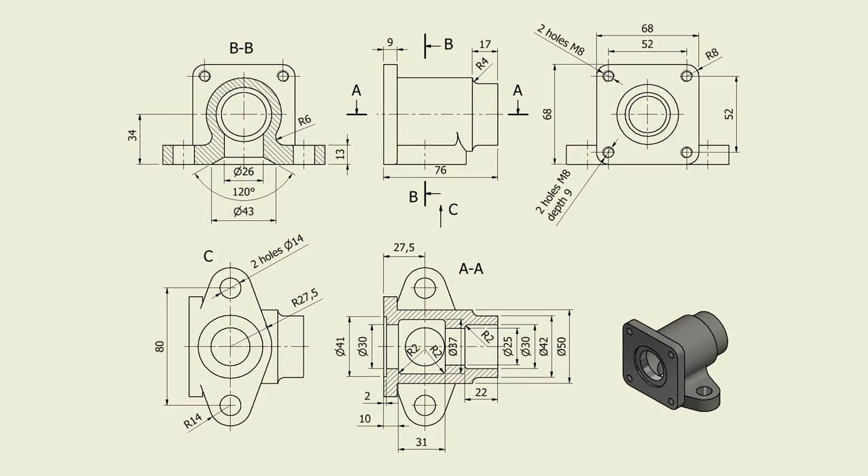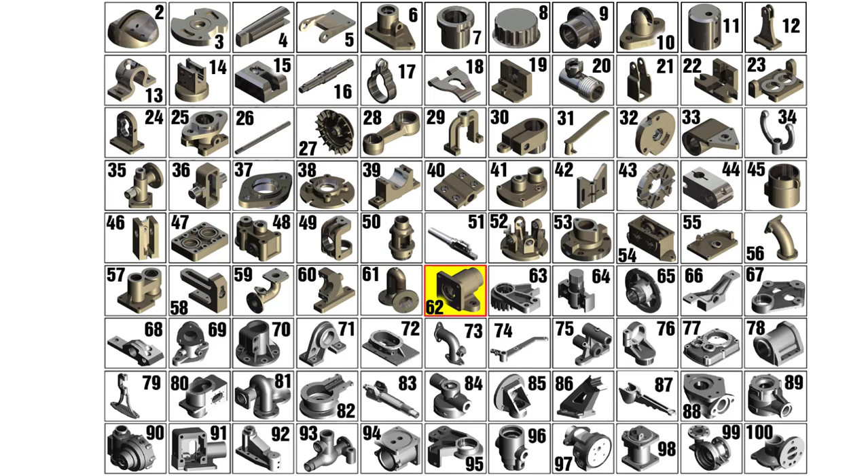Hi my friends, let's create the part number 62, which is called tap body, from my collection of 100 parts. The picture of this object is here. As you can see, there is a revolution volume and two flanges.

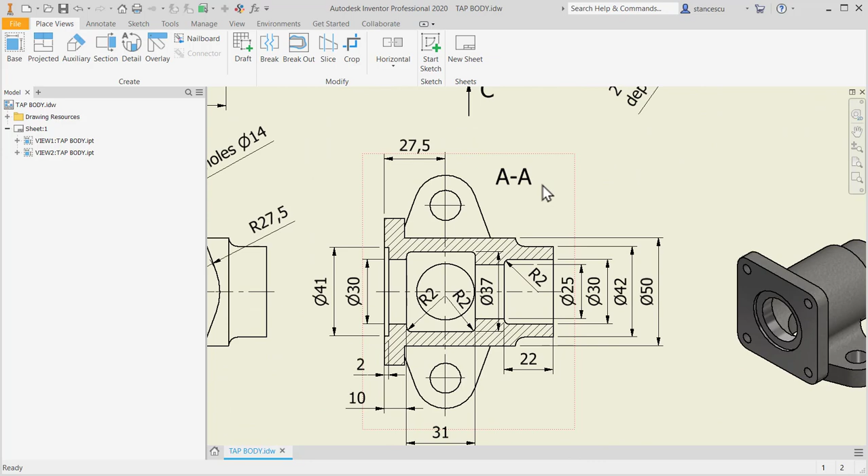The drawing shows us that we can start with creating this revolving volume without any problem. We consider dimensions from here and from here. The only missing dimension is this one, but this is the square flange, which has a diameter of 68. We'll use this dimension and then we'll create the flange.

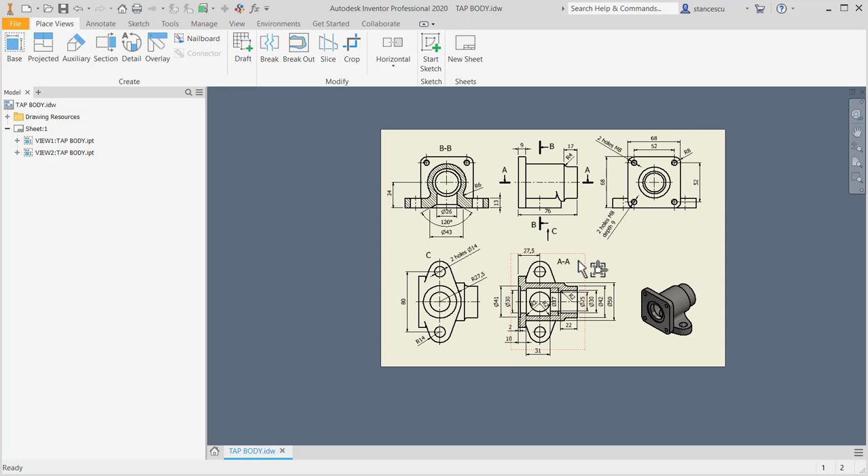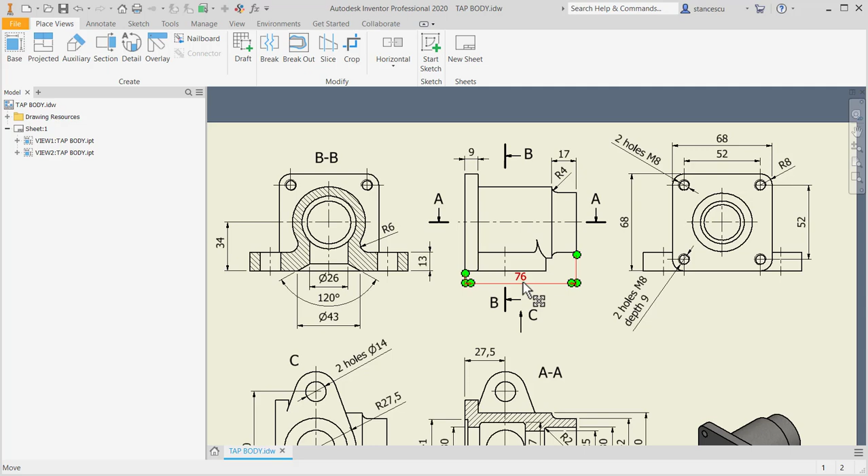Okay, dimensions are 41, 30, 37, 25, 30, 42, 50, and on the horizontal for external 9, 76, 17, and internal 2, 10. 10 includes 2, 31, and 22 from the other side.

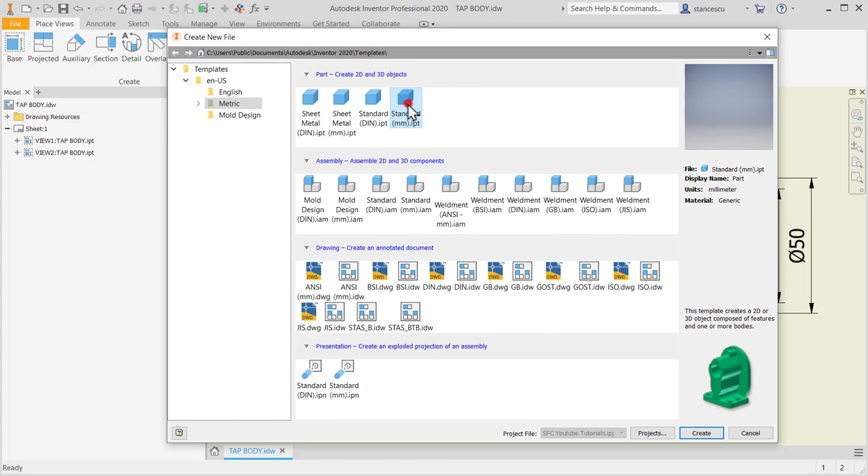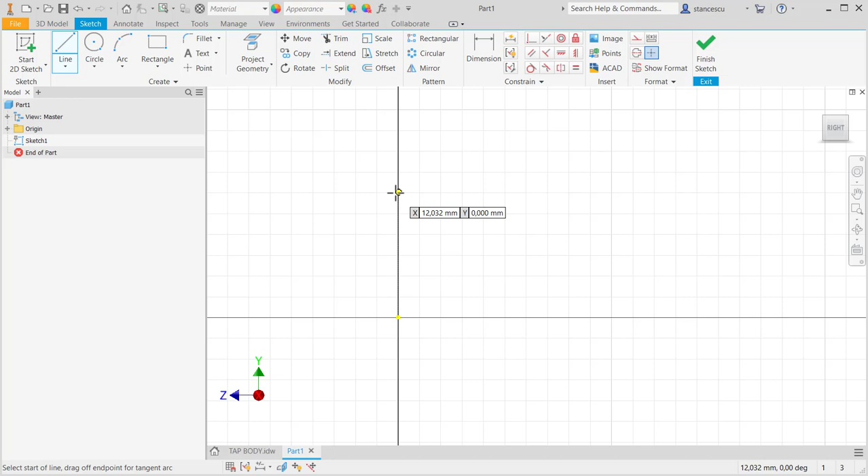Okay, let's create this construction. The sketch is placed in this plane to be the same presentation. And now external. No, I start from here. Now internal, which is somehow similar, but some steps are here.

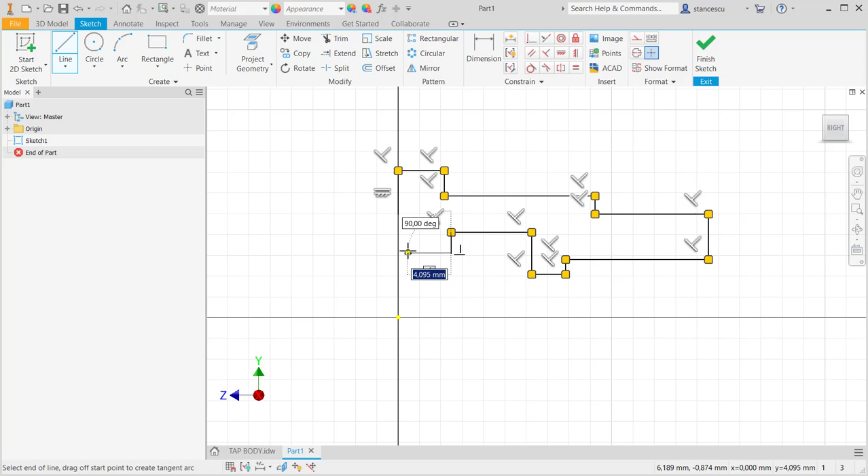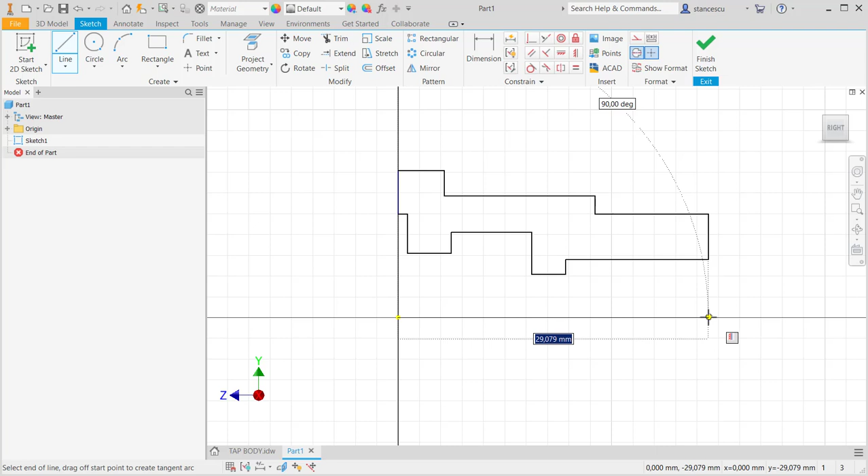Close. Closure is not here. This is the point. I draw a line and I apply extend. Okay, this must be coincident with the center point. I draw a line, center line, from the center point to the end, and again I apply coincidency here. Good.

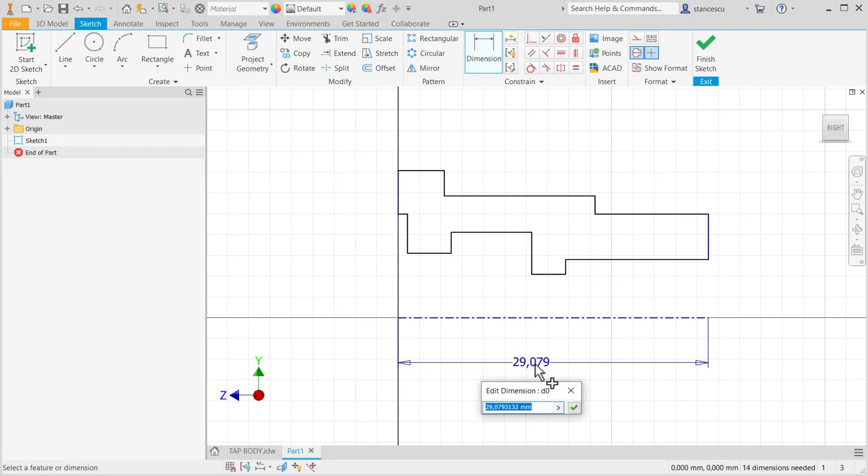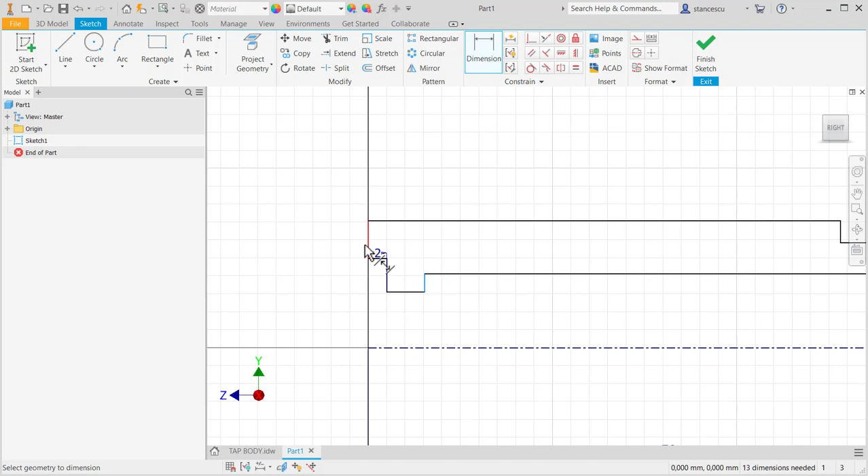76 is the length. Yes, let's apply this dimension and everything will be scaled. Yes, but not in the fashion I like. Okay, this is 2, as I said before. This is 10, including 2, and this is 31, and this is 22. Good. This is 9, and this is 17.

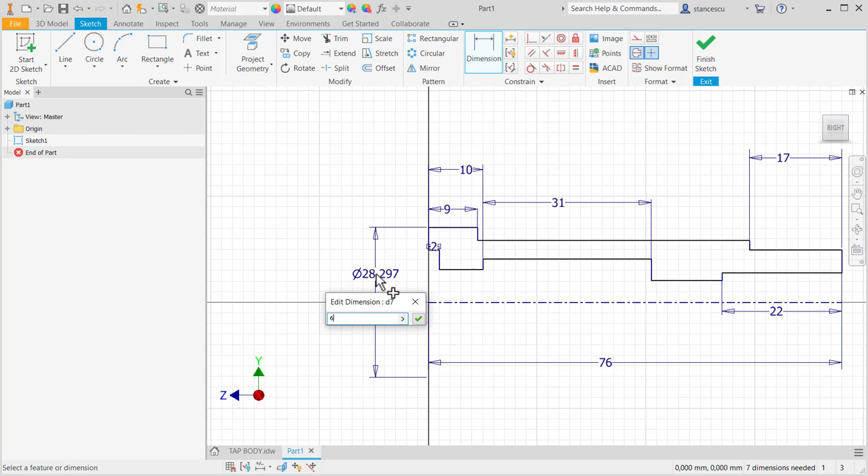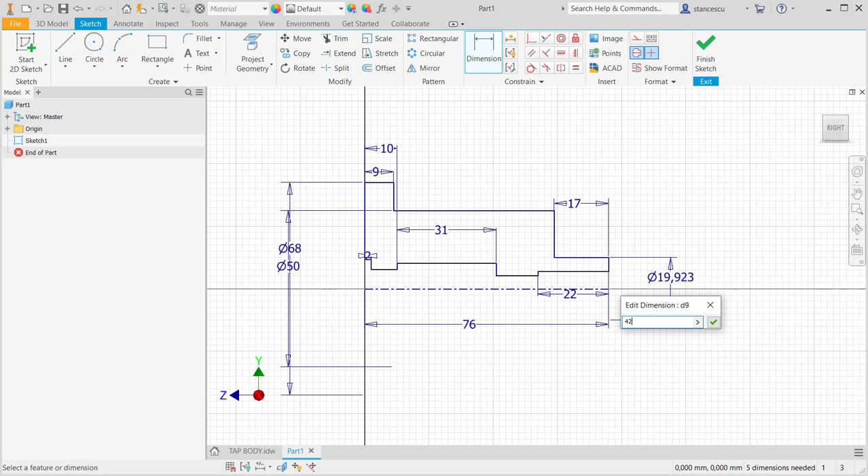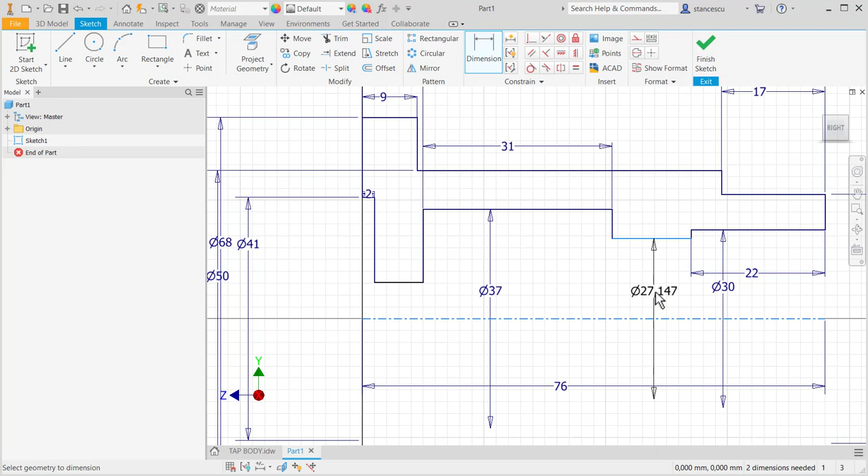And now diameters 68, and here 42. Good. Internal. This is 41. This is 37. And to internal 25, and fully constrained. Finish sketch, revolve. This is the main body.

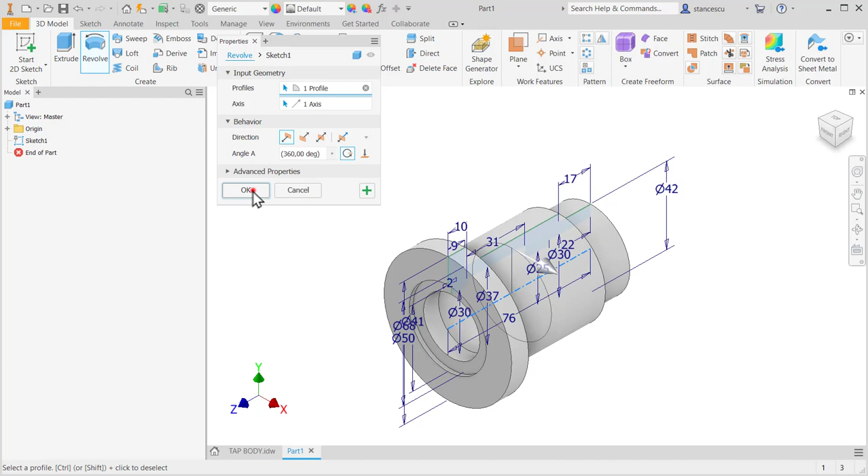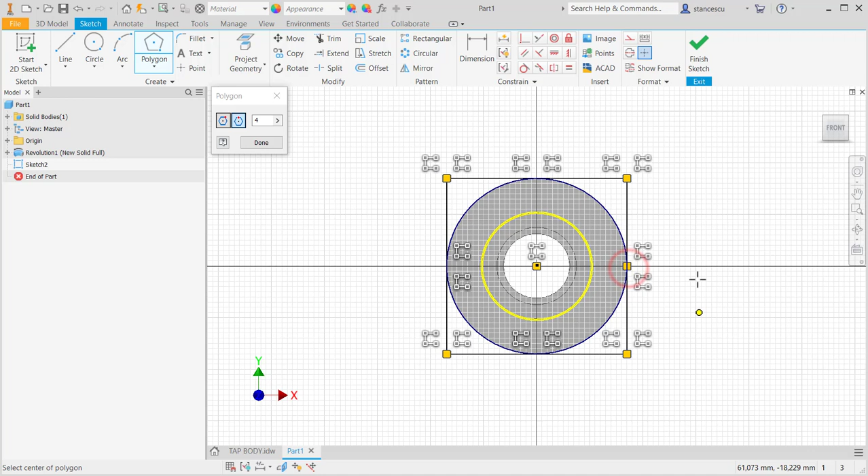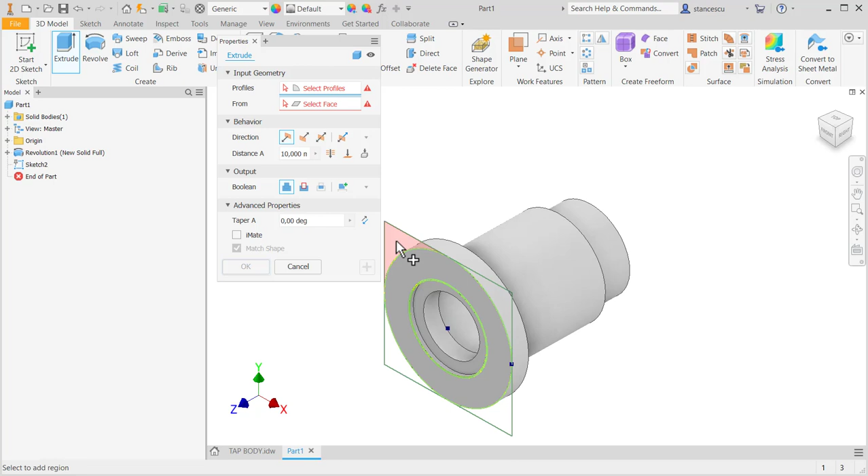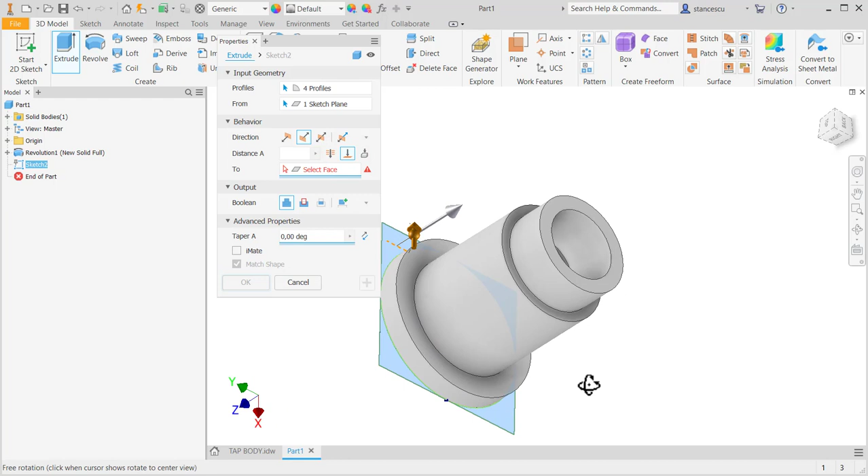Okay, let's place here a flange, which can be a polygon with 4 sides, and dimension being this internal, to create this, and make horizontal one side. Finish sketch. The extrusion has the same thickness with this, so I extrude only triangles. How can I call them? In the other direction, join, To, and I'll show this face. Yes, not any dimension was necessary to be placed.

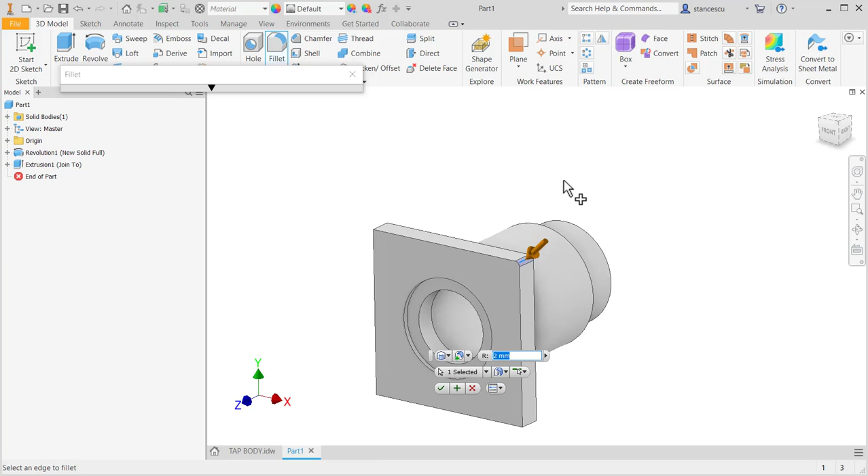Radius 8 of the fillet, 8. Every corner with 8. Okay, then we continue with the bottom flange, which is at the same level with the side of the square flange. Yes, these are on the same line.

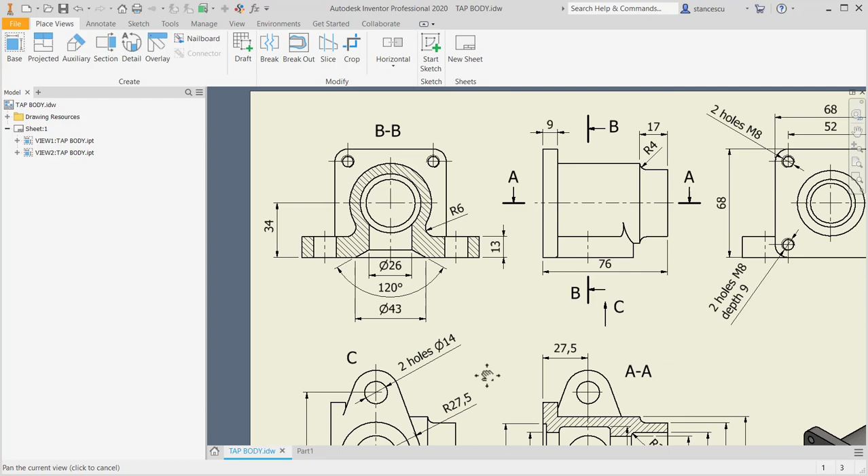The dimension is 13, the thickness, and dimensions are here. 80 the distance, diameter 14, and radius 27.5. The distance is 27.5. Then this is finished right here. Yes, the tangency will be here. Okay, let's create this flange.

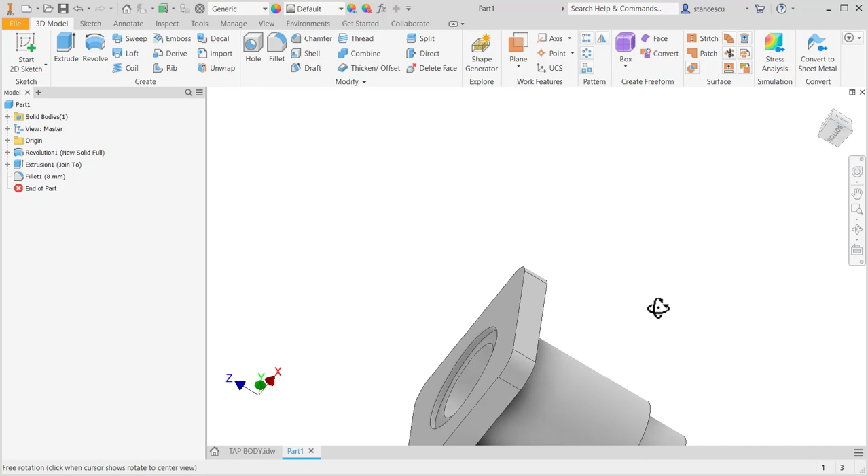I change the view because I want that flange to be here, and I draw a circle with the radius of 27.5, another one with the diameter 14, and another one. I apply equal to make them equal. I place on the same horizontal. Yes, this is that plane, the same horizontal, this point with this point, and the other with

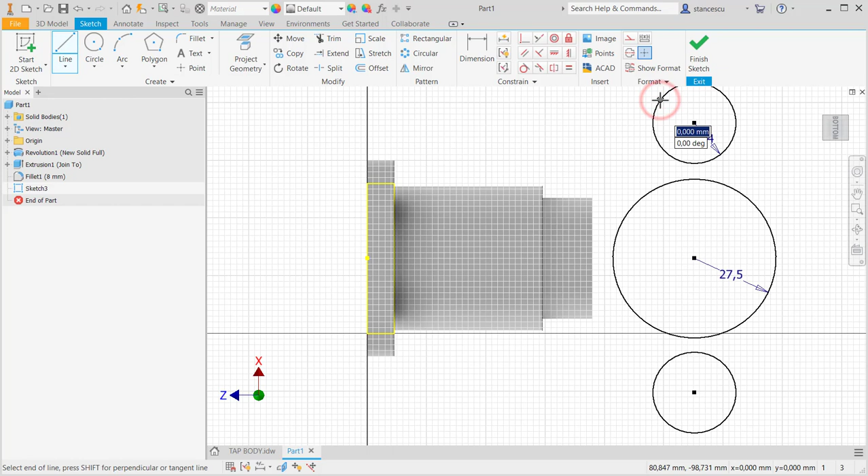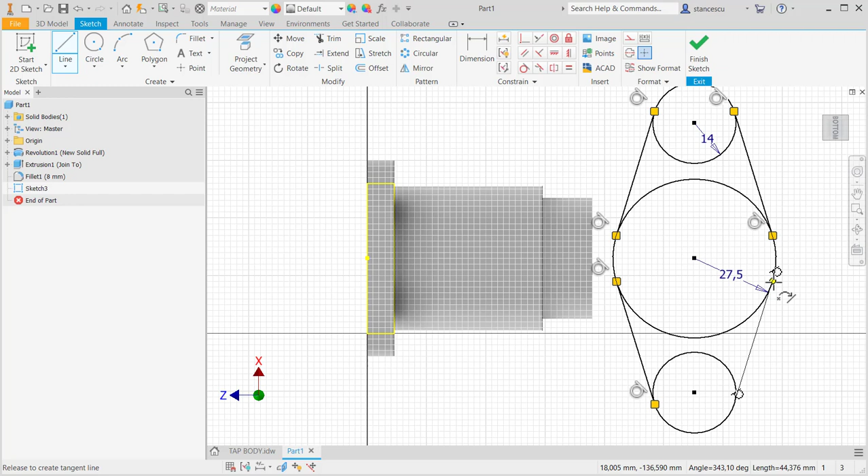the middle circle. Okay, now I apply tangent, click here, keep pressed, and look to see the tangent mark. Yes, keep pressed and find the mark of tangency. Okay, very good. Equal these two, and now I can trim these two, nothing is lost, and I have to apply split for at least one arc in order to change to construction and to maintain this dimension.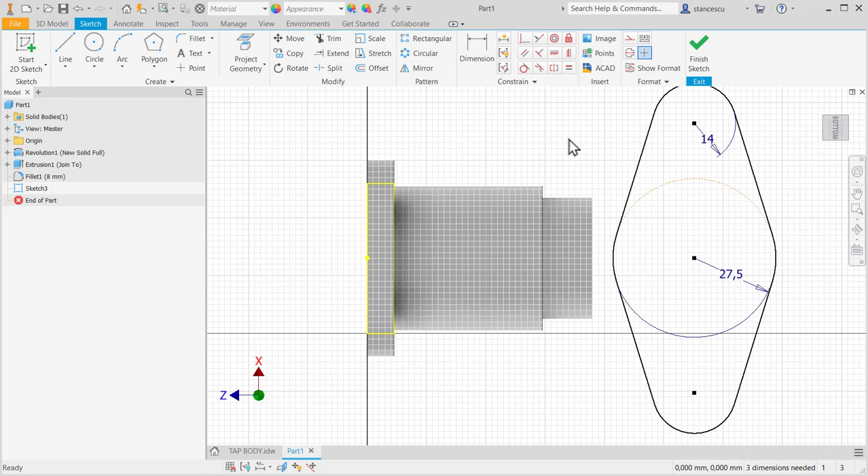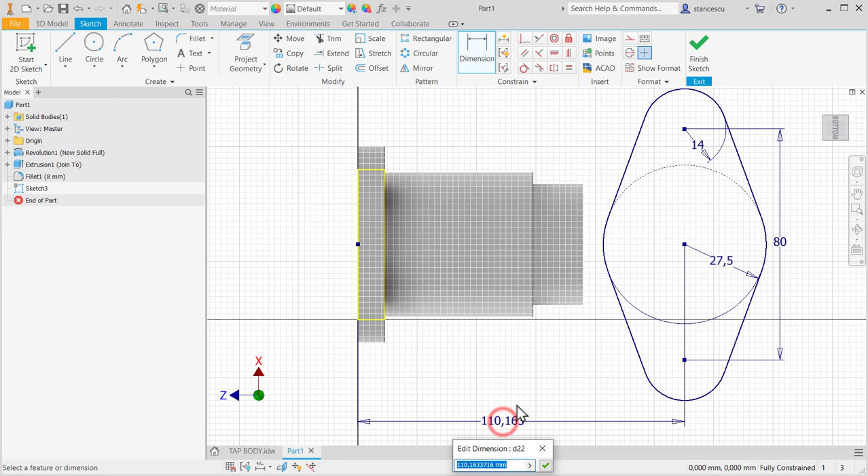It is only now that we apply the distance. This is a good strategy because the circles could be intersected and then to have problems. The same vertical for this point with this point, and the distance between this circle and this point or face of 27.5, which means that there is a tangency here, but we use dimensions in the drawing.

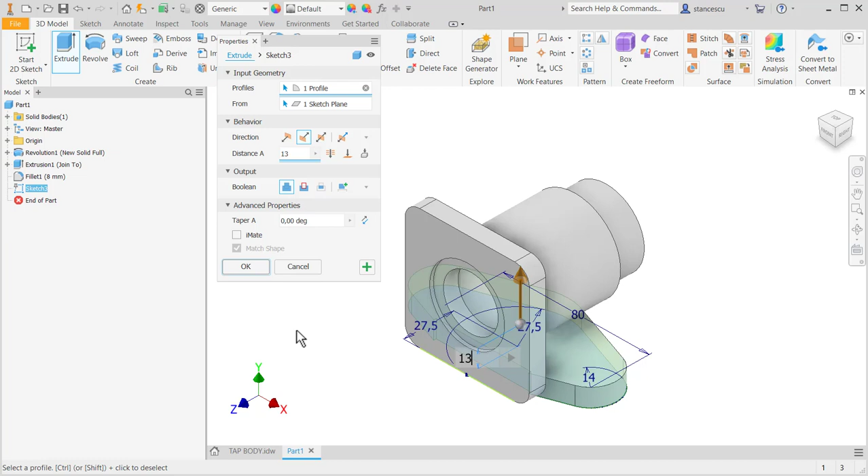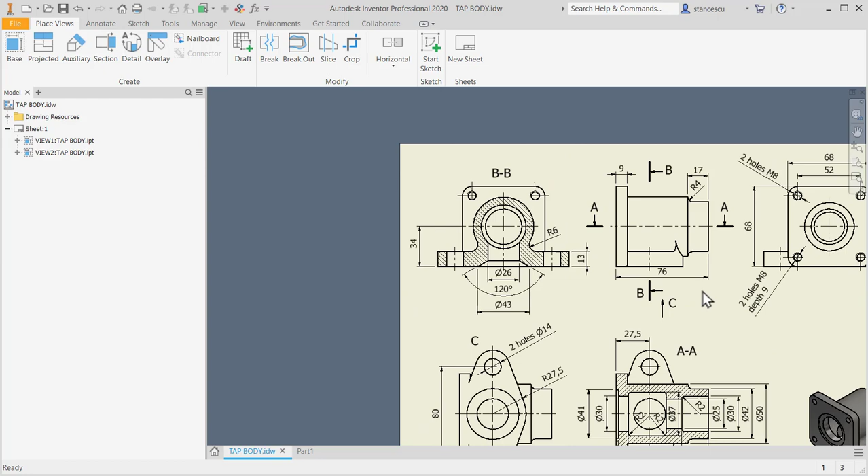Finish sketch, F6, and now extrude on 13, the other direction, join 13. Okay, nothing is disturbed inside. Yes, you see. Now there is a number of fillets, radius 6 here, radius 4. That's all. Yes. Oh, there are 2, 2, 2 inside. Let's apply to the inside because

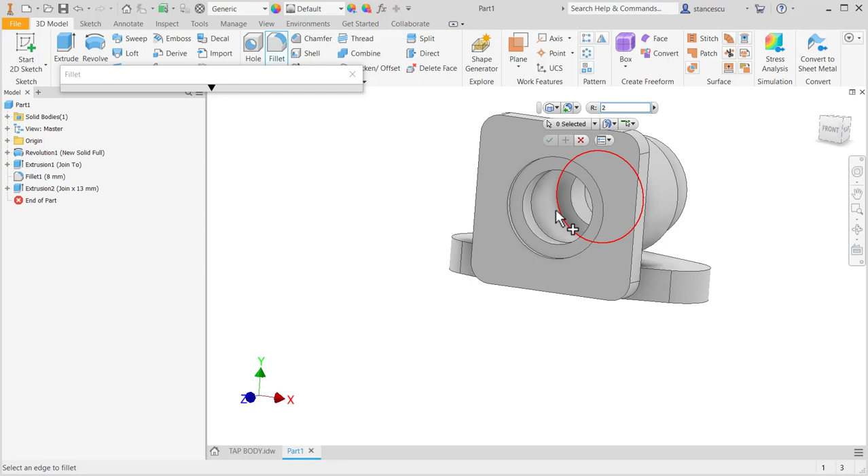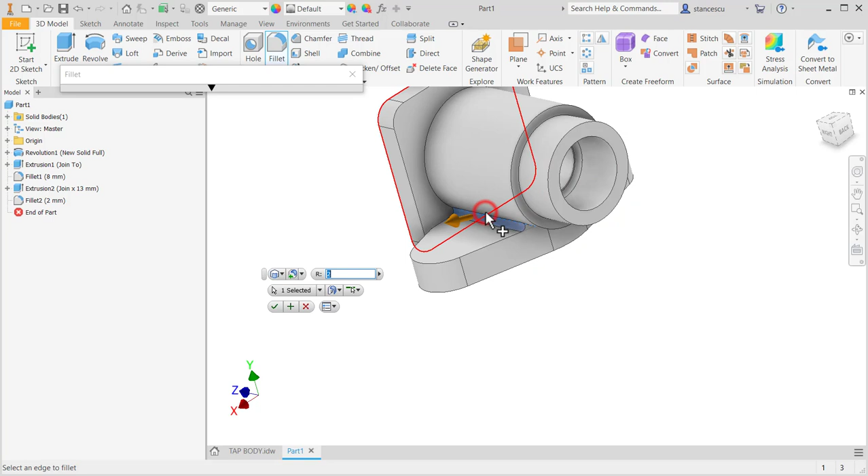it is the difficult one. Is this, another this, and the last is this one, 2, plus 6 for this, 6, and the other also 6, plus this one, which is 4. Okay, now

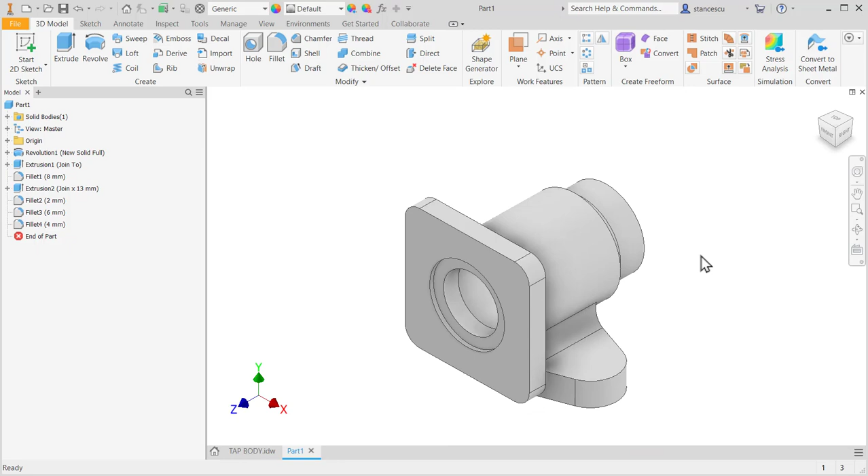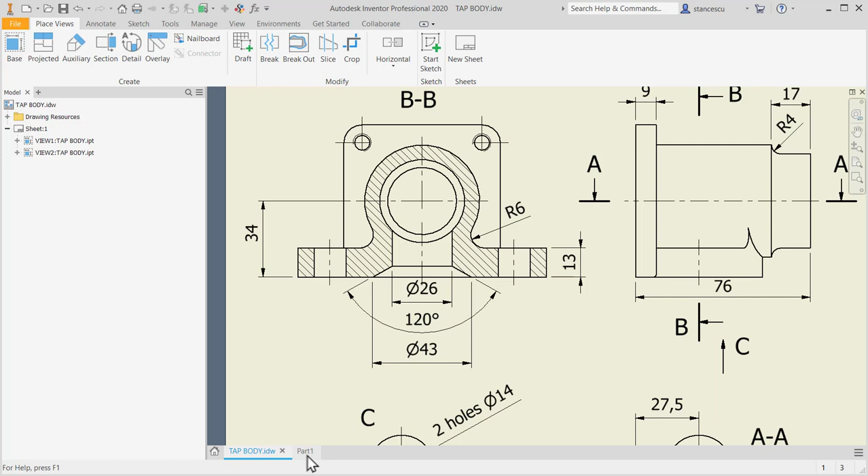holes. The main hole is this one, which is a specific one, diameters of 26 to this end, 120 and 43. Hole of this kind, countersink on this face, centered on this contour, and then let's apply dimensions. Tab.

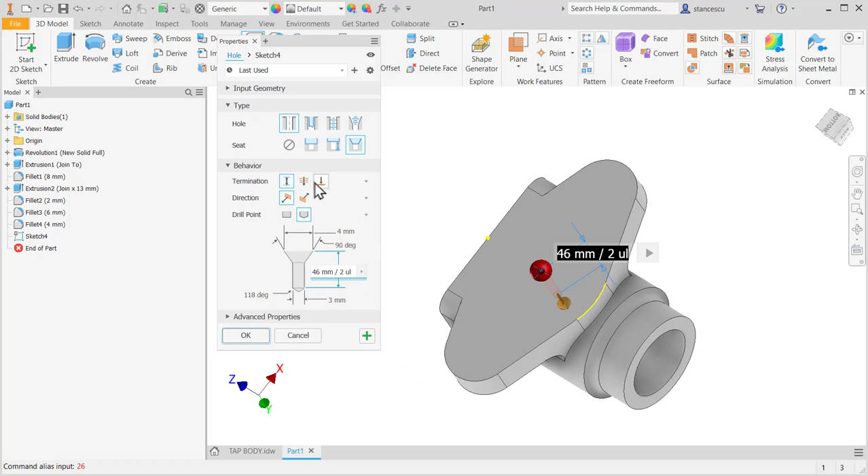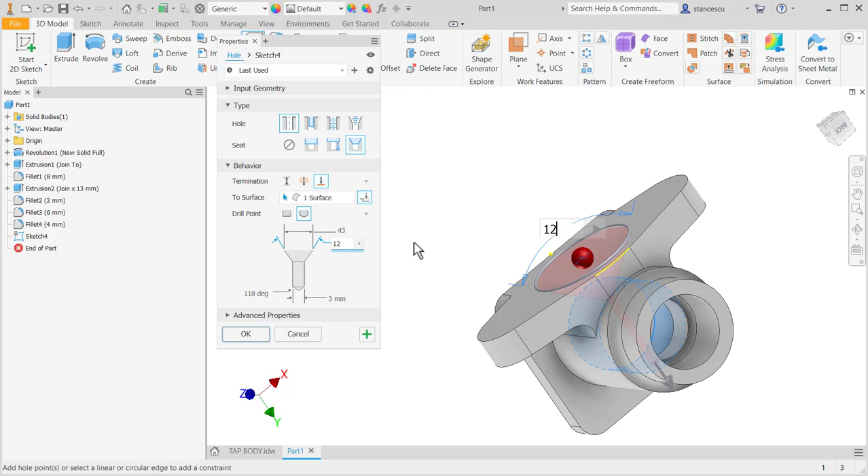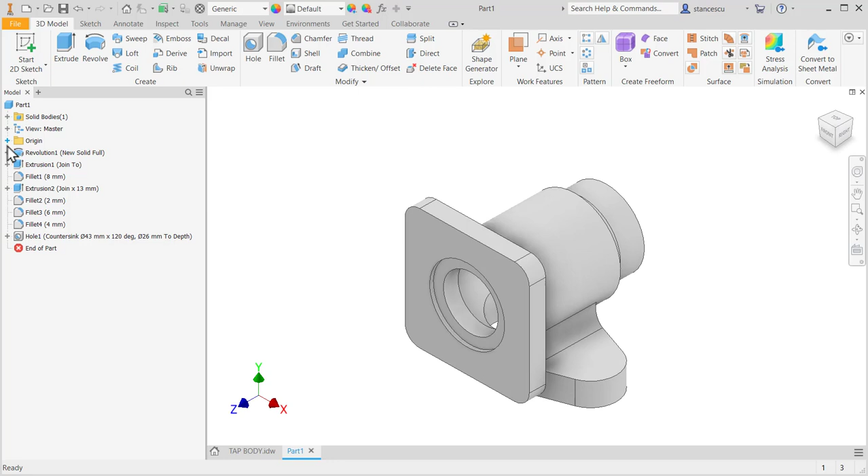The depth is 2, and we select this internal, tab, 4 millimeters is 43. Tab 90 is 120. The angle of end, and now 26. Okay, you see, very nice. We can look inside, you know how, by using a trick, and this is the internal.

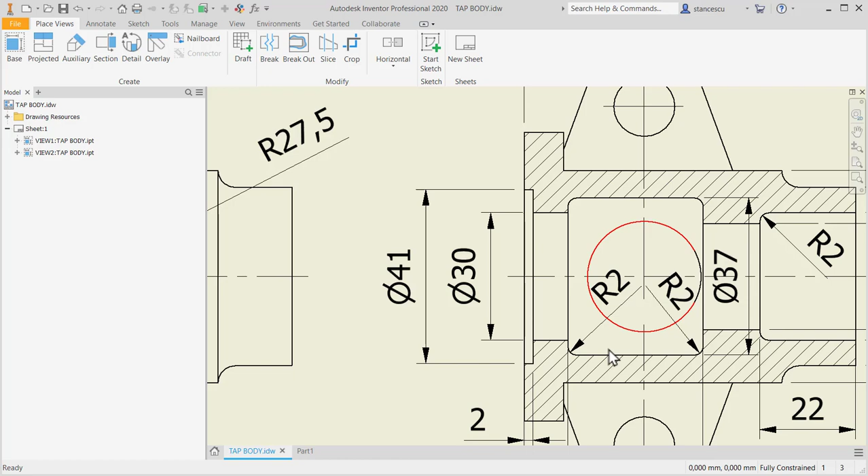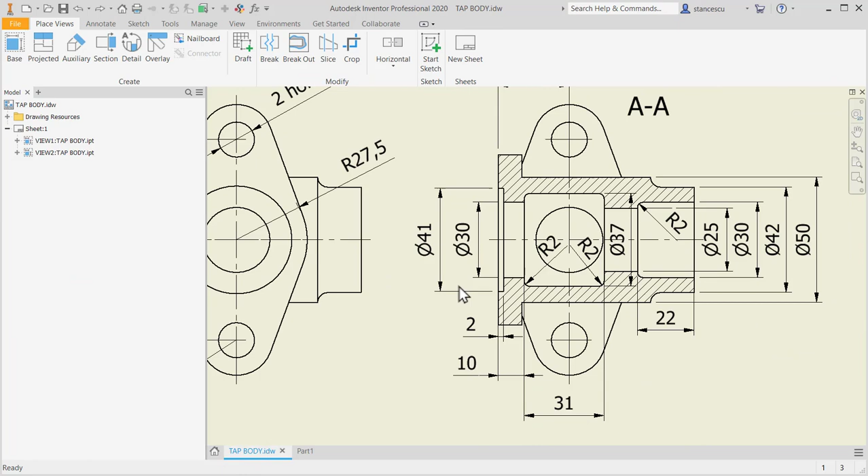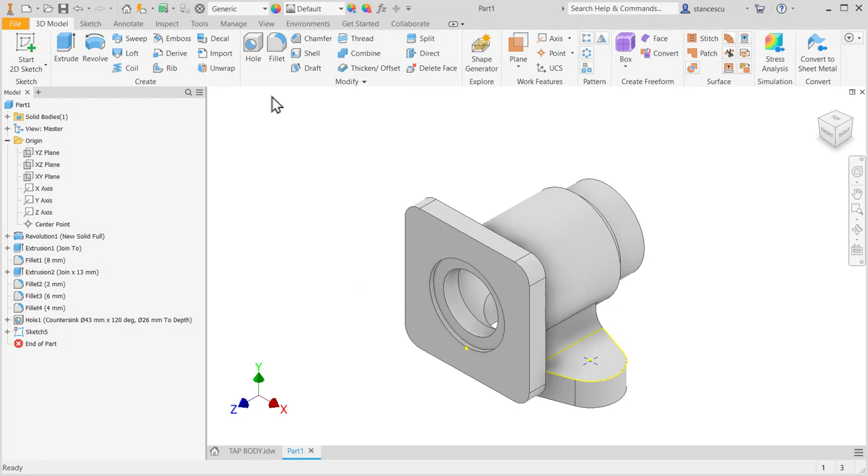We don't have here a section of this kind, but we see that this hole is very near this line. Yes, there is a small distance between these two. Okay, Control Z. I don't create that sketch. Now the other holes, two holes of 14. This face, I project the symmetrical one. I mark with points, and then hole, simple hole through of 14, and both holes are created.

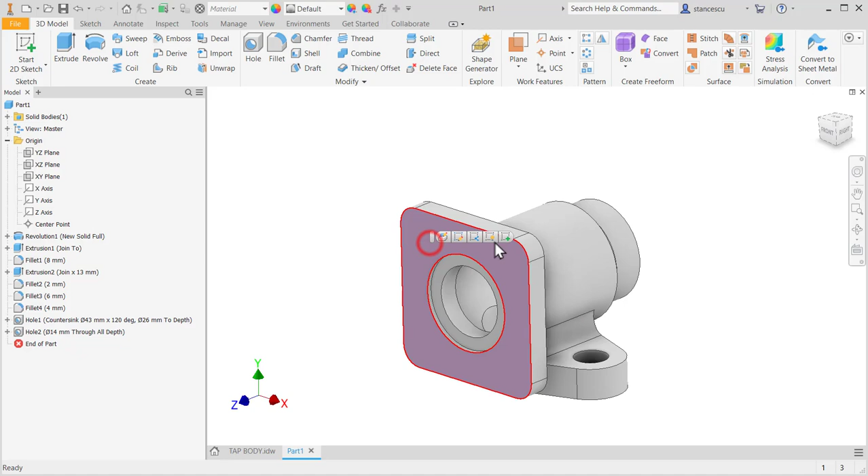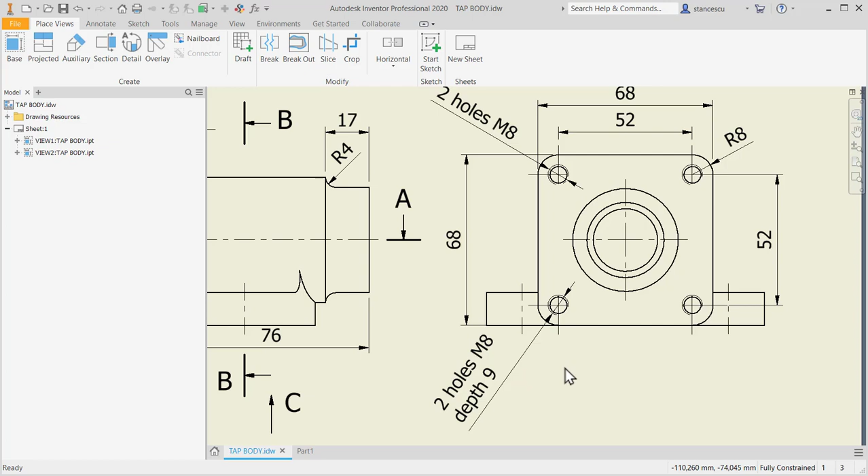Okay, now there are some other holes in this face, which are two holes M8, metric 8 through, and two holes with a depth for both thread and hole of 9. Yes, two are in the air here, and two are not outside. Okay, hole threaded, ISO 8 through, 1, 2.

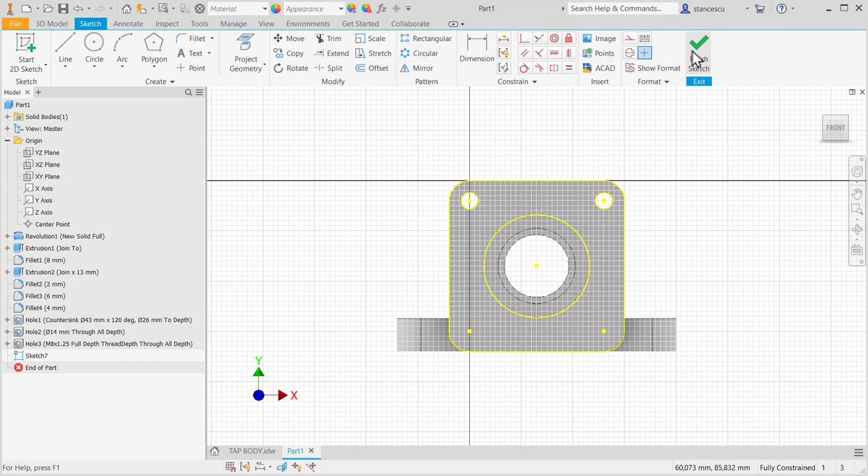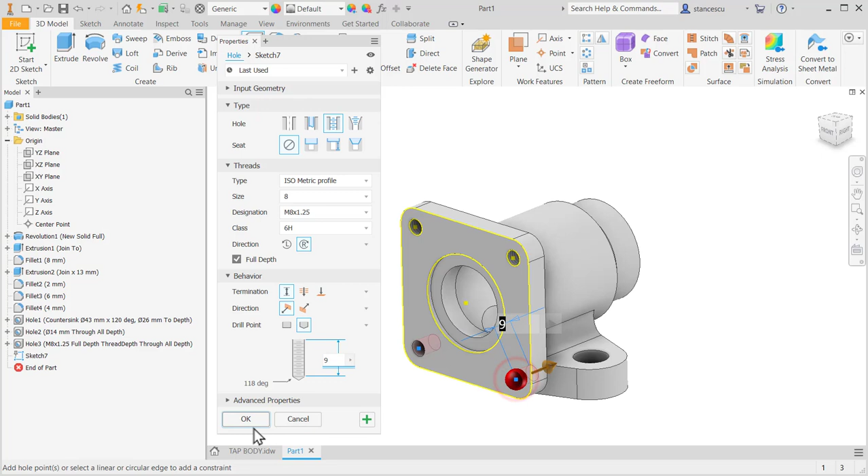I repeat this creating of a sketch, hole with points, but not through, a distance of 9 to both holes. This is the part, my friends, nothing else. We can verify, but nothing is to be added. Yes, that's all.

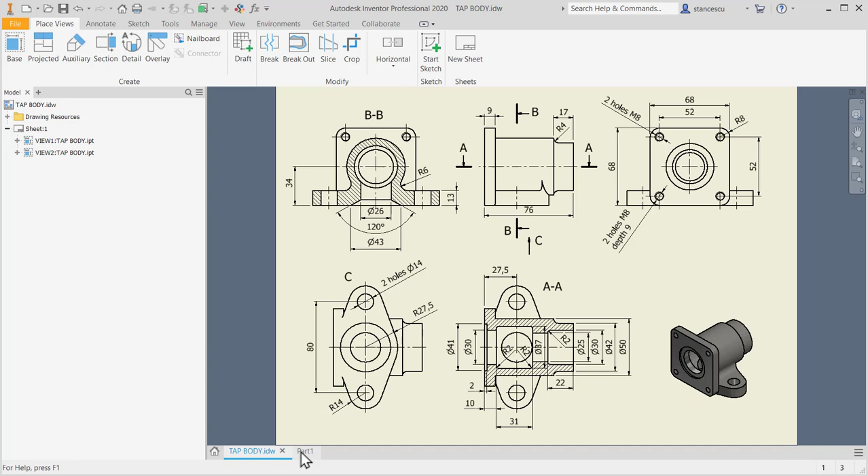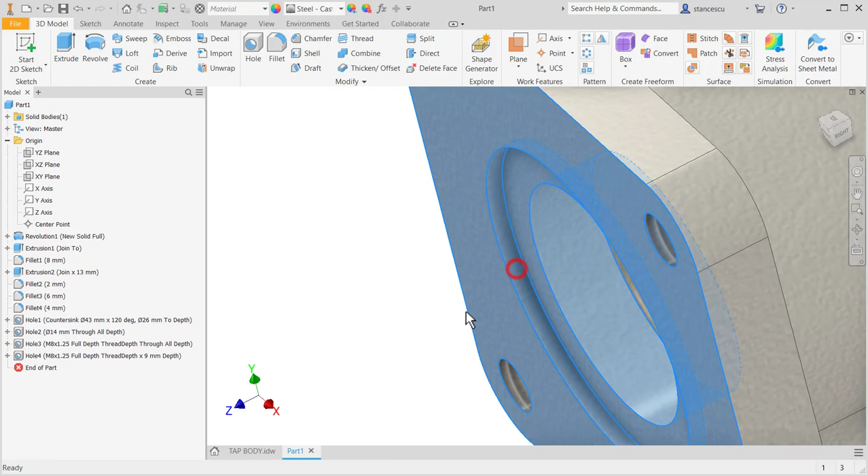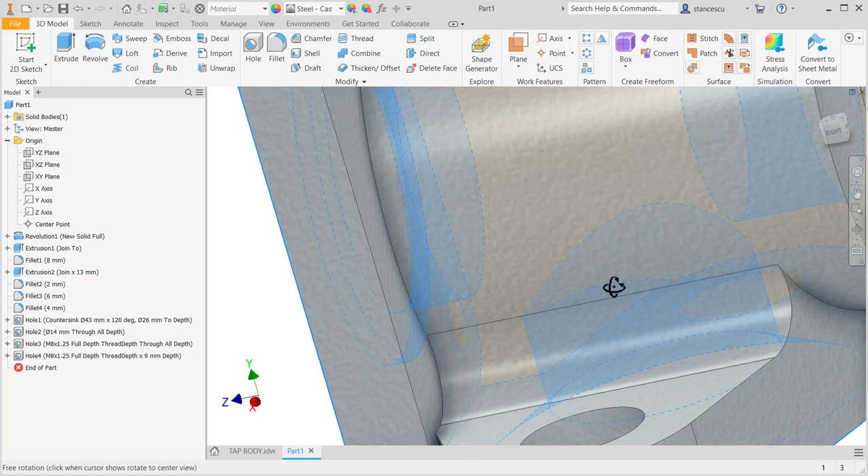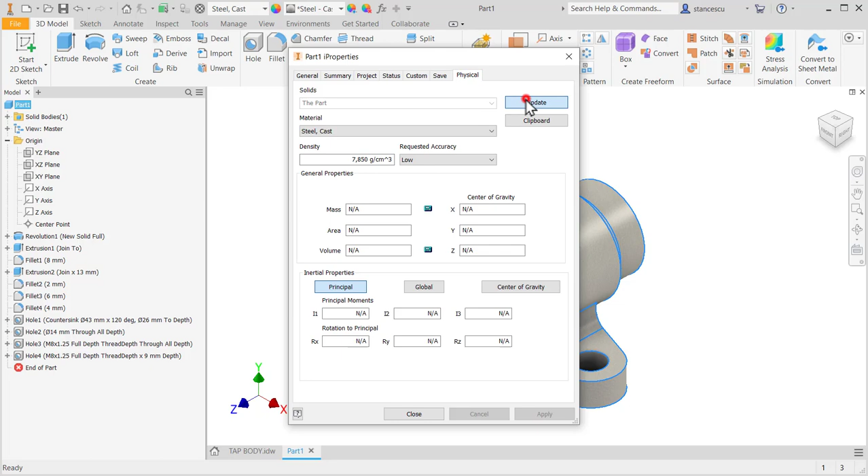Okay, steel cast, steel cast, and some faces to be machined. I suppose that all this must be machined, also this, and the face of the flange, the conical face, and that's all. Let's apply also to these holes to be polished. Update. A small part of 1 kilogram.